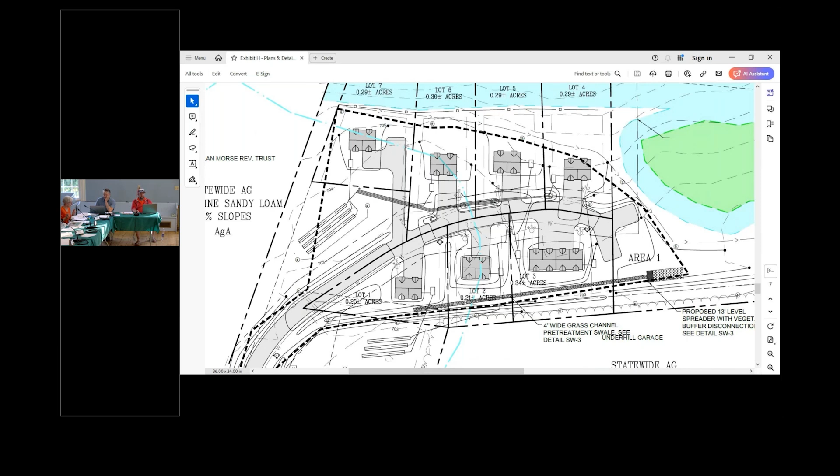Penny Miller: George, on SW3, you have a detail of that level spreader. To help me understand it, could you tell me what that section is? Is that a longitudinal section or cross section? So if we're looking at the sheet that's on the screen here, that's a cross section that runs in the same direction as the swale, so sideways across the screen. Okay. And that's at the front end, you can see where it's got the darker shade right underneath area one? Yes. So that's a horizontal cross section of that piece of infrastructure.

And then downhill of that is what we call a disconnection area. That will be the primary area where stormwater infiltration happens for the more common, less intense storms. It dips down? No, it maintains a constant pitch. It pitches less than 3%, but yes, it pitches down. Okay. I think I get it.

Can you explain the culverts? So where are they going to run? So I think we're showing 2 on here at the moment. Let me jump back over to that sheet. Okay. What sheet is it?

SW, it's shown on this one as well. I was looking at the detail sheet answering Penny's question. Right. So we've got 2 culverts under the drive and then 4 culverts total. So the first one is going to be right at, if you scroll up a little bit, Brad, right at the corner of lot 1, you can see there's a dashed line that runs underneath the road with a 6 on either side. So that's the culvert and associated head walls.

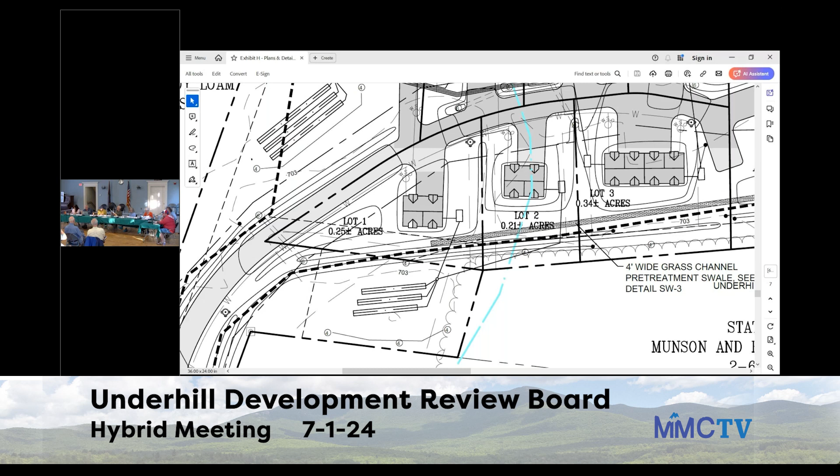Okay, hold on. So on SW2, the blue dashed and dot lines look to be the wetland buffer in the legend, but they are not. Those are lines between the soil types? Well, there's 2 blue lines on the plan, and you're correct. The soil boundary layer did not make it on the legend, so my apologies. The solid blue and solid green are intended to be the wetland and the wetland buffers. And then the dashed blue line kind of runs through the house sites. If you look at the plan here, you can see it's running through some of the houses. That's a soil boundary layer that did get missed from the legend, so my apologies there.

Okay. All right, that's good. I just want to be clear that that wasn't really some large wetland stretching around there. Correct, yeah, no, that's a soil boundary that didn't make it on the legend. May I ask a couple more stormwater questions? Is this appropriate? Absolutely.

On exhibit, pardon me, 1 second, exhibit P, which was actually your sketch plan review package, you show under C1 a stormwater structure past that level spreader to the right of it. That is not on this plan. Correct. Was that inadvertently left off, or was that a conscious decision? That was a conscious design decision. When we went in for a sketch plan, we knew we were going to have to do something for stormwater infrastructure, but we weren't exactly sure what yet.

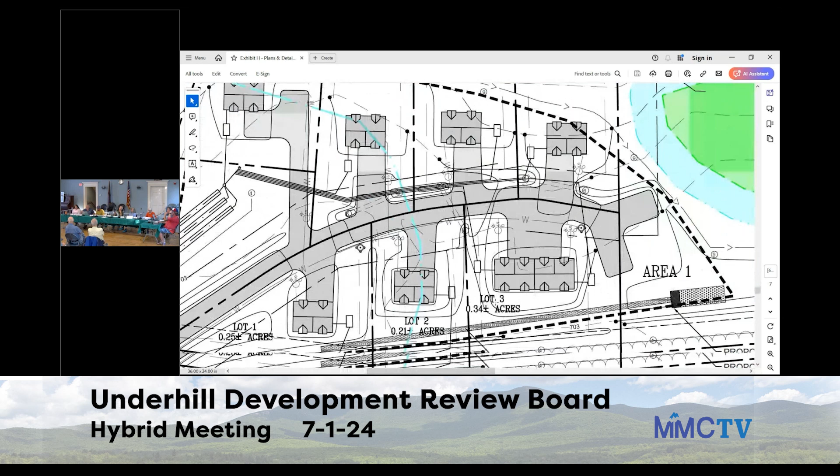Brad, do we have anything from the Underhill Jericho Fire Department regarding an ability to serve letter? So I sent the fire department a link to the packet. Haven't heard anything back from them yet, but I will ask them. Okay.

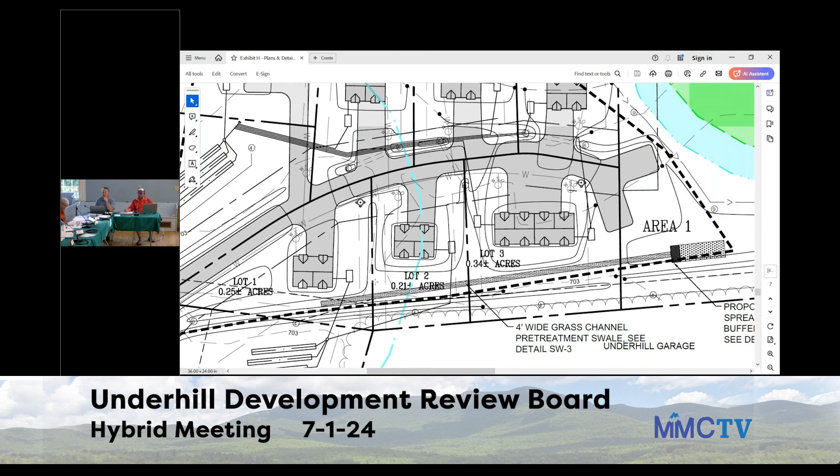Just have a couple of questions on Exhibit D, the preliminary hearing review packet. Which one, Dan? Exhibit D. I think it's quick. It's the third page. 8.2.I is landscaping and screening. It talks about the wetland and buffer zones were previously hayed and will be allowed to grow to restore to their natural state.

I'm just curious if that's entirely factual, or if that mowed path on the back in the wetland buffer will be continued to be mowed and used as a path, or if other parts of the fields may continue to be mowed to be utilized for events. I'm looking for that now. I did not realize that was in here. It's okay, just pointing it out. Yep, thank you.

I believe the intent would be to continue allowing that to be hayed. And I know the church uses a portion of that field for their harvest market. So we would continue the existing uses within that field of being hayed and for the harvest market, but no development on the wetlands or buffers. So thank you for pointing that out. I didn't realize that was in there. All good. That's the impression I was under, that it was going to continue to be hayed. Yep, that is correct.

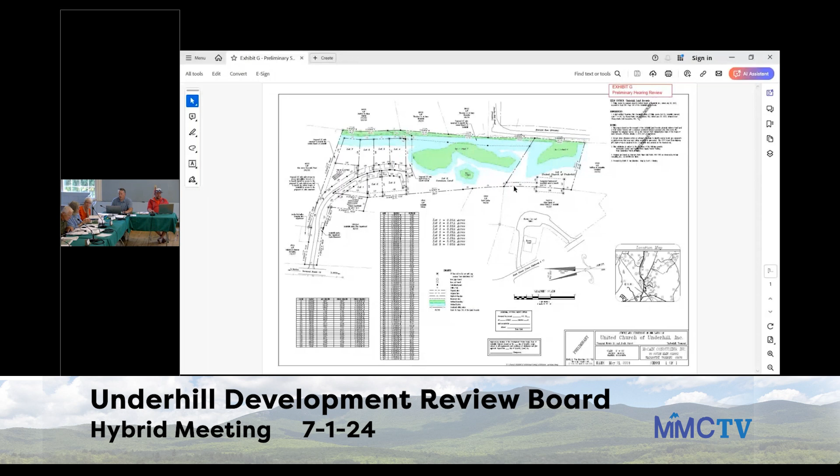All right. So you're on it, right there on the left. It's right there. We should get you a professional person, Brad. Are you talking about this easement? No, you were on it, to the left. Go to the left farther. We can't see it on the screen right now. You have to scoot over. Well, it also wraps around. No, scoot to the left. Oh, sorry, so north. And right there, it's that text right there.

It says proposed 20-foot wide easement to benefit the United Church of Underhill. That's what we're talking about. Yep. So that wraps around the uphill side below the swale and extends out towards Harvest Run and Lot 9 that the church will be going through, and then extends within the right of way for the driveway down to Route 15. So that wraps from Route 15 east to the northeast corner of the property and then runs to the south along the east boundary all the way over to Lot 9. Oh, okay. I think it widens out to 40 feet on the east side. Okay. It's just 20 down on the north side.

And while you're there, Brad, I can't remember about the Macaulay boundary line adjustment that's part of it. Can you scoot back to where you were? Hasn't that been executed? That was previously executed. That's over. It was a discrepancy before the church took control of the land, or before they completed the sale. They realized that there was a boundary line adjustment that had been approved, but deeds had never been recorded. So they cleared that up on the plat. So we wanted to keep the reference there consistent with the prior surveys. Okay.

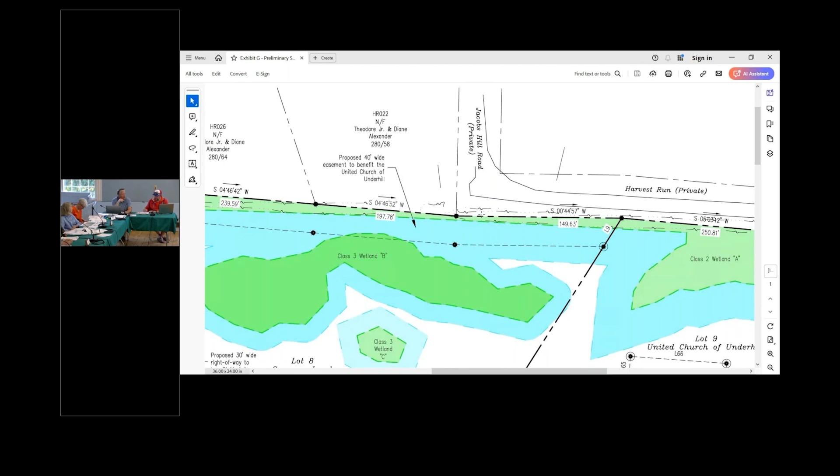I'll jump in while we're talking about easements. I believe the last subdivision that we did with the Jacobs parcel before it was conveyed to the church included a pedestrian easement across the field. And I'm not sure if that should be showing up on this. I don't recall seeing that in the survey. So essentially the plat that O'Leary Burke prepared for when the church purchased the property. And right here at the corner of Harvest Run, on 22 Harvest Run, that's owned by Alexander now, the DRB had the applicant reserve a 10-foot pedestrian easement to get from Harvest Run to the church property.

And if it's okay, Charlie, I have some comments on that, or do you want to wait? No, okay. I have a few concerns about that. One, that would be a reasonable request if Harvest Run was a public road, right? So Harvest Run is a private road, and this pedestrian easement is going across what's now privately owned property by the Alexanders onto privately owned land by the church. So I'm not sure what the DRB had in mind, I think Nick Atherton was here at the time, but I question the legality of that, and I also question what was the reasoning behind it. So I'll talk about that.

There's an existing culvert and existing pedestrian path there. And when we did the Alexander subdivision, there are those lots at the bottom, if you were to extend Harvest Run. It's on the screen. People wanted to be able to walk through the field. And so we created that easement across the Alexander lot to this church lot. So that's what the request to the board was. It really affects Alexander, not this application, right? Right. I guess my point is you're creating rights for certain individuals and not the public. I could see a reservation for a pedestrian easement if Harvest Run was a town highway. Right now I can't walk down Harvest Run, cross that pedestrian easement and get on legally.

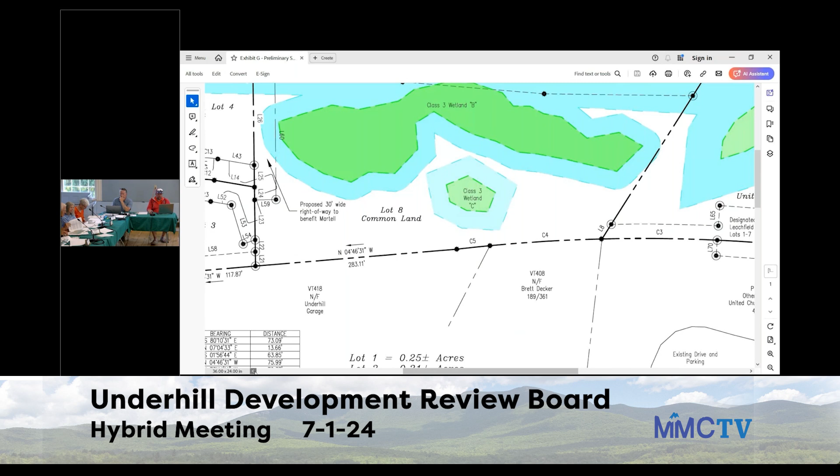George, quick question on the utility infrastructure. Is the fire district going to take over the water line, or is that TBD? That is TBD. I don't believe we've had that fine-tuned discussion with them yet. Okay. I guess I haven't done one in Underhill for a long, long time. In most towns, they wouldn't take over responsibility for it, but they do want to make sure, like we've had discussions about the right kind of fire hydrant because they have a special connection that they want for their trucks. So I don't know if they take responsibility for it, but they're certainly having input on its design. So if there's a break in a water main, if the fire district doesn't take it over, it's the homeowners association that's got to fix it. True. Yeah. Okay.

Charlie, what is typical in a development? Are you asking that just because of the fire? It's not clear on the application, so I was wondering if that hadn't been thought about yet. Okay. It all depends typically on what city you're in.

Is there an example of the homeowners association agreement in here that I'm missing? I see Exhibit O, which is the planned community. Yeah. There is a draft HOA and maintenance agreement in there, yes. Excuse me? Which one is it? I'm looking at a different set of attachments, the ones I sent over versus the town website, because I forgot to log into the Wi-Fi before I sat down. I can tell you. It is Exhibit O. Oh, so this is the homeowners association agreement here? Yeah. This one? Yeah. Okay. It's pretty long. Well, there's some blank pages.

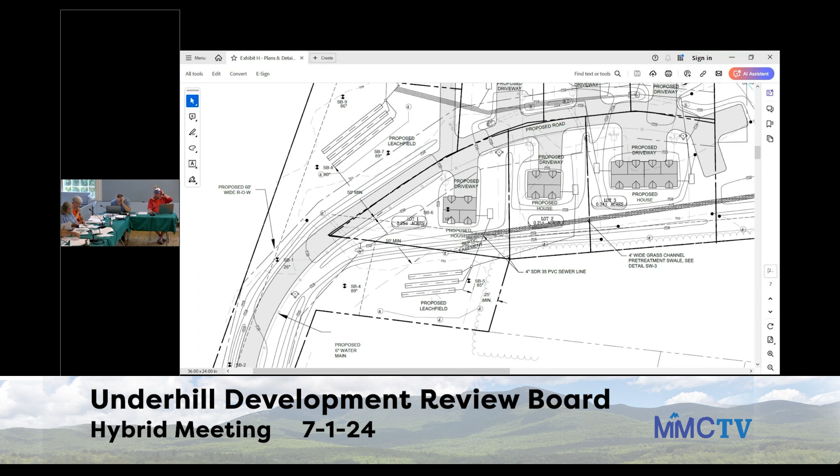It's not really 19. Yep, and this is a draft one that is typical of what Habitat for Humanity does. So this was provided by Habitat based on what they've done for other similar developments. I just kind of wanted to understand the road maintenance and how they're going to share their costs and if that's all stipulated in here. It is. Pretty clearly it is. Plowing, which, if there's just going to be one house, it's a pretty long driveway for someone to have to maintain by themselves. Okay. Yeah, they even have design review in there. Oh, yeah? You think Underhill regs are tough. All right. And lawn care.

And then that 5-acre parcel, is that stipulated in here? Who's going to take care of that or oversee that? Yeah. They talk about the open space. They do talk about it, yeah. But about maintaining it? It's in there? Yeah, and how it's shared and the like.

George, this is really a question coming from ignorance. This is Penny Miller. Is there any technology that might be considered to mitigate unexpected or unexpectedly large climate issues, as in, would one want to make that ditch wider? Would that assist in holding water better? Or

You mentioned at one time, this probably is a crazy idea, but you mentioned at one time that there is gravel in part of the project down 3 feet. Could catch basins be put in that would go down 3 feet that would direct water to that gravelly area, or would that undermine the structures above? Or there are different types of infiltration practices. It becomes more akin to a wastewater design than a stormwater design when we're doing the infiltration pieces.

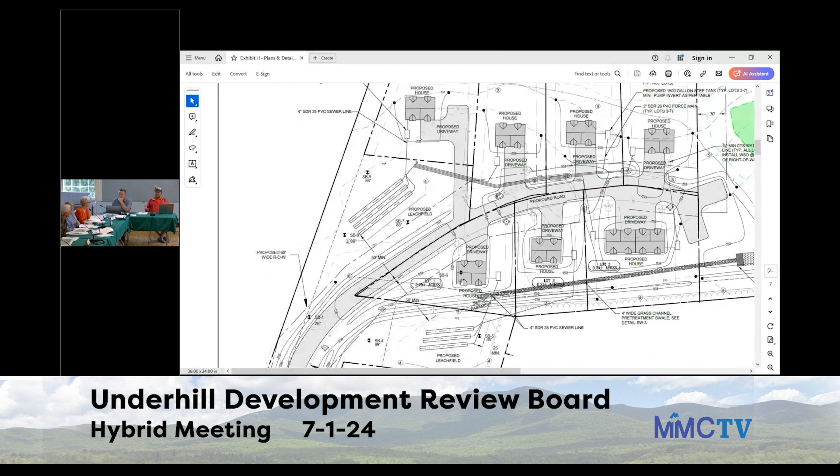What I think I had been referencing was a different type of stormwater structure that's referred to as a gravel wetland. It's a gravel bed that collects stormwater, but it actually maintains a permanent pool elevation and mimics the function of a natural wetland. So in this case, I'd have to think about what technologies exist for the extreme climate events. There's a lot of innovative and alternative treatments for water quality treatment, but less so for quantity. Quantity is all about volume. So it's just making bigger, like you said, maybe making that ditch wider.

What about the idea with making the ditch wider? The ditch, of course, isn't just related to the proposed development. It's related to existing developments directing water, coming from one hill, coming from the Meadow Lane area, right? And coming from the Jacobs Hill area, all go into that ditch. But what about increasing the size of that ditch, or maybe the depth doesn't matter, but the width?

So I guess we've got 3 ditches that we're looking at here. There's the existing upstream swale that bisects the property. There's the diversion swale on the uphill side, and then there's the treatment swale on the western side. I meant the ditch beside anything you can think of or want to throw out. But I was specifically referring to the homeowners that showed us some photographs of, I believe it was the ditch that runs along the western side of Harvest Run, fills up, sometimes overflows.

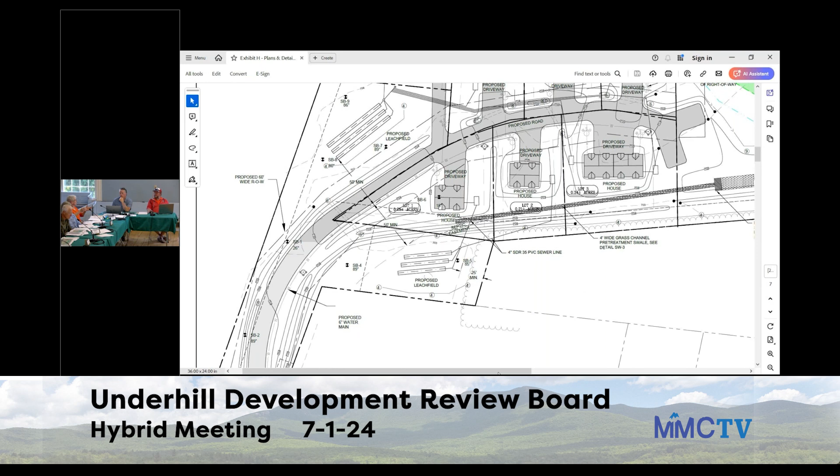It's depending. I've seen this happen any number of times, that it's not necessarily a large rain event, but it might happen in the winter, that things are frozen and we get a weird wet spell with rain, and then it doesn't infiltrate and that ditch fills up. Would it matter to create some bigger wetlands there, or who is supposed to maintain the ditch? What if trees or branches fall in the ditch, or does it need to be dredged? I remember Phil Jacobs talking in hearings past about having to dredge the ditch. So who's responsible for maintenance, and how should that ditch manifest to be the best for the area?

Yes, I think regular maintenance for that is good. I know there are exclusions, even though that's in a class 2 wetland, because it's previously constructed infrastructure. There are maintenance exemptions that are allowed for within the wetland rules to maintain that ditch. Making it bigger may require a wetland permit, but certainly maintenance in its existing condition is allowable under the wetland regulations. I do not know off the top of my head who has the legal responsibility for that.

I do know we started to locate both sides of that in relation to the property line, so we could see exactly where it was and wasn't on the Harvest Run property. But I do not know, other than whoever's property it's on needs to maintain it. I don't know if there was ever any discussion of that ditch in relation to the prior subdivisions of Jacobs and who's responsible for that swale when it was originally constructed.

So since Penny opened the door, you've seen a letter from the people on Meadow Lane, right? Yes. So, the primary question is when Roaring Brook gets flooded, a lot of the overflow runoff, especially in the wintertime, goes into the field behind all the houses, right? This empty field that we've got. And with the addition of new houses in there, the question is, where's the water going to go? Right?